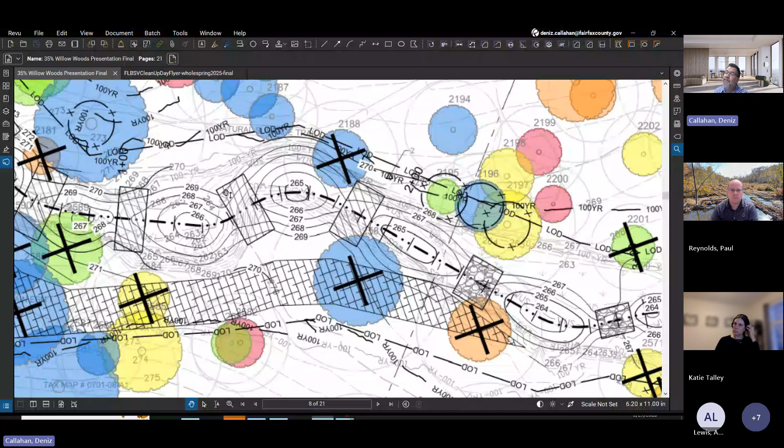These various circles here are what we refer to as grading, which is just moving earth, that sort of thing, depicted by contours. These circles have elevations associated with them. These other circles are pools, and these structures create like dams at the bottom of each pool. That's a method we use to step the pool or stream down as you progress downstream. I don't want to call it a waterfall, but that's kind of what it is.

There's a legend here on the right side of the sheet. Again, if you wanted to come back and look at the presentation, anything that stands out to you on the plan is briefly described here on the right side under the legend.

Are there any questions so far from anybody? Okay.

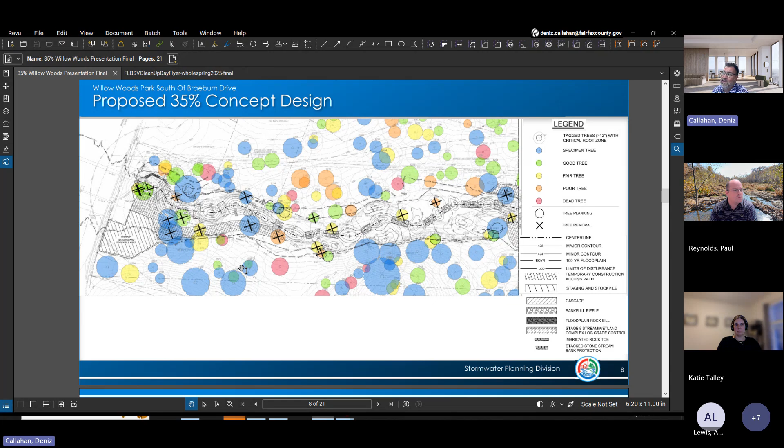So this is the upstream end of the project. On the next sheet, this point right here is what we refer to as a match line. If I go to the next sheet, my hand right here picks back up right here. Okay, so we continue downstream.

This is the proposed center line for the design of the main channel of the stream. It goes in and ends approximately at that point, at which point it enters an existing storm sewer system.

I think I touched on a tributary or an intermittent tributary earlier on - that would be this guy right here. The proposed work we have for that intermittent tributary is less extensive than the work proposed for the main channel.

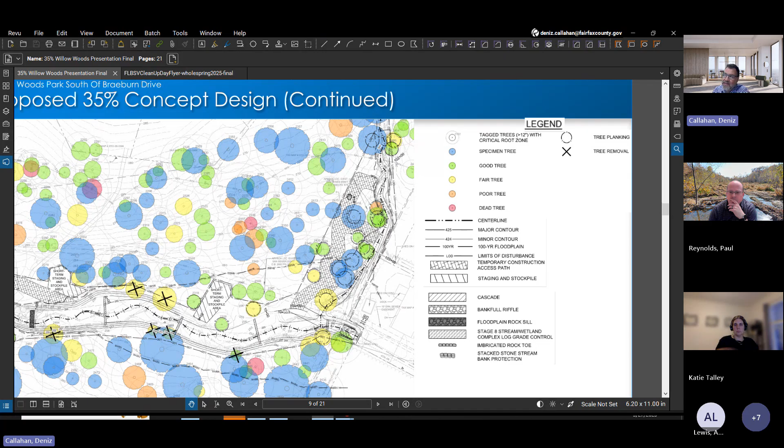Again, this temporary access road here is denoted by this brick hatch pattern that looks like a very squiggly road. It's temporary, and it's there to allow access to the tributary to do the work.

We wanted to provide this slide here again, not to harp on design considerations, but we really do go to great lengths, both the county and our AE Biohabitats, to try and do the right thing and design this so that we minimize impact, et cetera.

So just touching on some of the tree stuff I went over - right now at this stage, that little squiggly in front of the 424 means approximately 424 trees were surveyed, again only the ones 12 inches in diameter or greater. At this stage, approximately 25 trees are proposed for removal, which I think is really good, but that is subject to change, so please don't hold us to that. Again, the point here is to show that we really try to consider that.

I think I touched on it earlier, but the removed trees will be reused on site to the extent possible. We're continuing to refine the tree removal plan from the previous two slides. As design progresses, there could be some more tree save, but at the same time some more tree removal necessary. So all that comes to fruition as design progresses and finalizes.

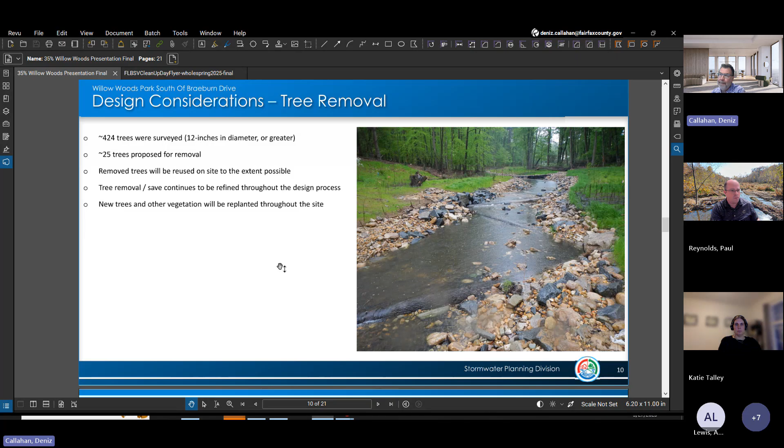This is the last technical slide here. I wanted to provide this just to show essentially what's happening with this project. So the two diagrams here to my right, if you follow my hand, this is as if you're standing in the existing stream, either looking downstream or upstream. And the dashed line here is the existing channel, the existing stream - so here, as well as here.

With this particular project, in general, what we're doing is raising the bottom of the stream, which helps to alleviate a lot of the things I touched on earlier. It eliminates the deep cut, incised channel. It eliminates the widened channel. Doing this helps to spread the water out onto the forest floor, etc. So all these are very good things.

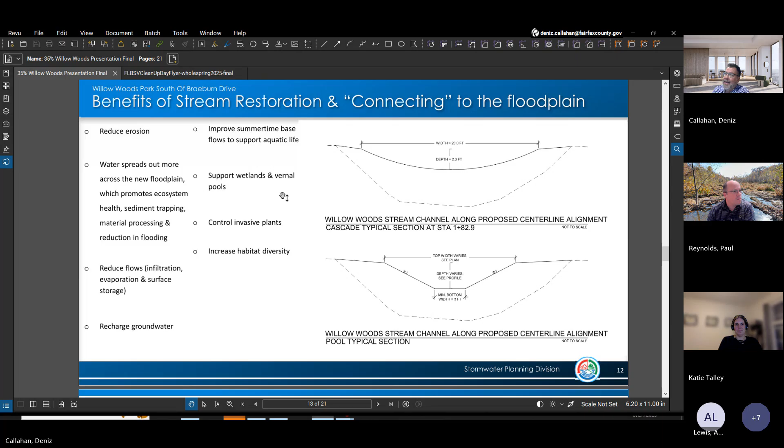Another big benefit is stream restoration helps to support wetlands and vernal pools. I had to look up exactly what vernal pools meant, but those are just small, shallow wetlands that form in the spring from rain or snow melt. They eventually dry up, so there are no fish in those, but that's a good thing because it makes those areas good breeding spots for amphibians and insects like salamanders and frogs. That promotes biodiversification, which is just a fancy term for more species and more genetic variation, touching on habitat diversity.

Moving on to the next slide, a couple of project requirements and impacts. I've got about 9 minutes here, so I apologize, but I do want to take some questions, so just bear with us.

I touched on the construction entrance off of Braeburn Drive. There's one entrance for the project, that would be it. There's an existing asphalt path from Rosedale Lane that goes in a westerly direction, spans, and ties into that pedestrian existing bridge I showed earlier, and continues on to the Canterbury Woods Elementary School property.

It's very early in design here, but the plan is to have an intermittent closure of that existing asphalt trail. There certainly will be times where the trail has to be closed, but we're trying to have it open when possible to maintain that pedestrian connection between Rosedale Lane and Canterbury Woods Elementary.

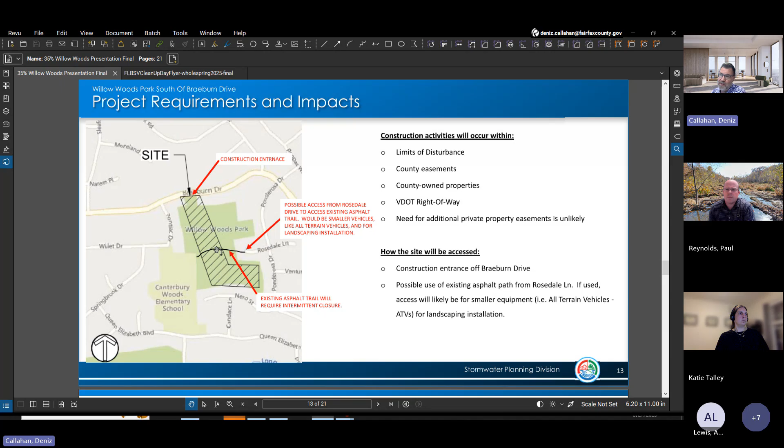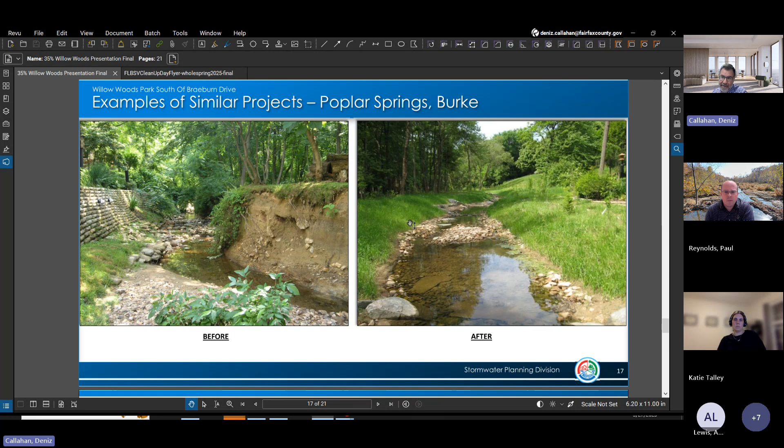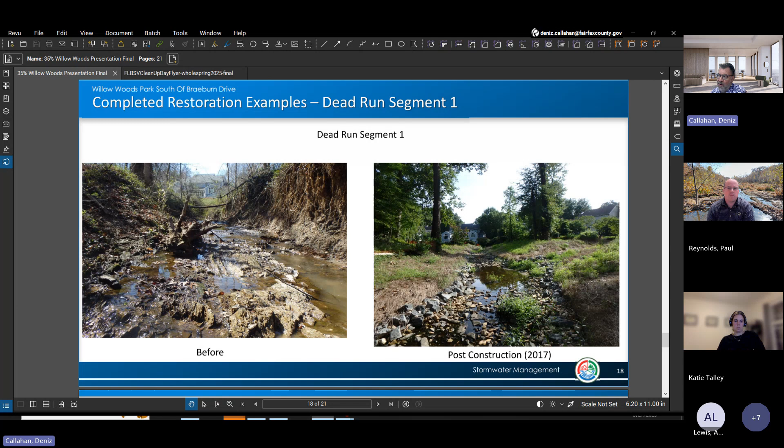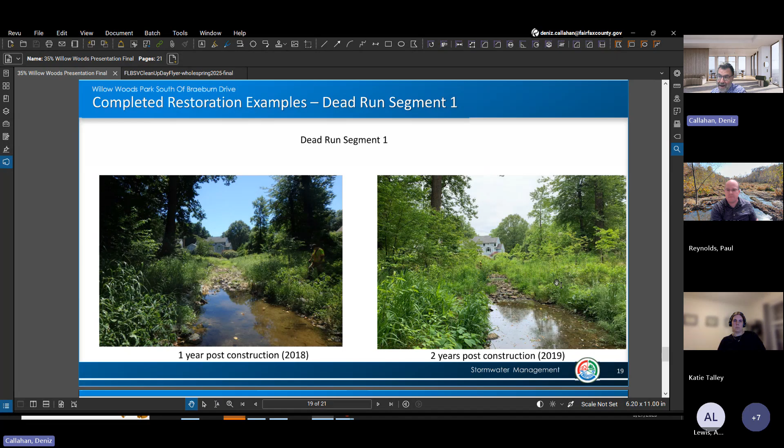So we'll continue to have public meetings as design progresses at various milestones in design. Construction timeline is yet to be determined. Our goal right now is continuing with design, finalizing design. There's an awful lot that goes into that, a lot of cooks in the kitchen, if you will. But the goal is to finish the design, get it permitted, at which point we hand it over to a different department down the hall, and they begin the bid process and manage the construction of it.

After it's constructed, we do something called post-construction monitoring. We are actually currently doing pre-construction monitoring, which essentially monitors the condition of the stream from a sediment perspective, a vegetation perspective, even amphibians—all kinds of different things are looked at during monitoring. We do that post-construction as well, to confirm the stream is functioning the way we designed it and the way we want it to function.

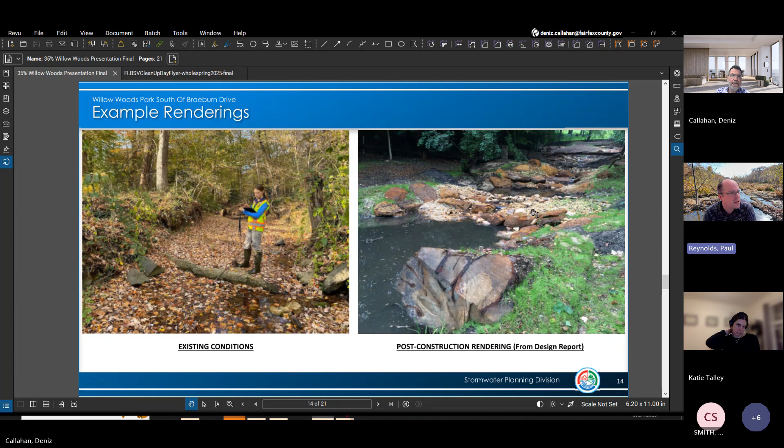I can't see the chat window, so if there's... So Deniz, there was another question from Philip asking about how wide the limit of disturbance is. I know it varies quite a bit through there, but I don't know if you have some average measurements throughout the stream valley of the width of the limit of disturbance. Or if not, I can take some measurements for you. Yeah, no, I can answer that. It varies, as you noted, but let me take a spot here.

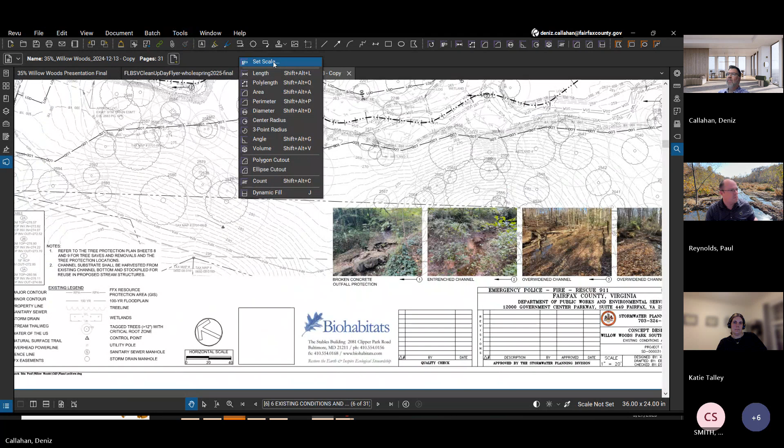Okay, so why don't we pick this spot roughly here? I'll do a quick measurement from here to here.

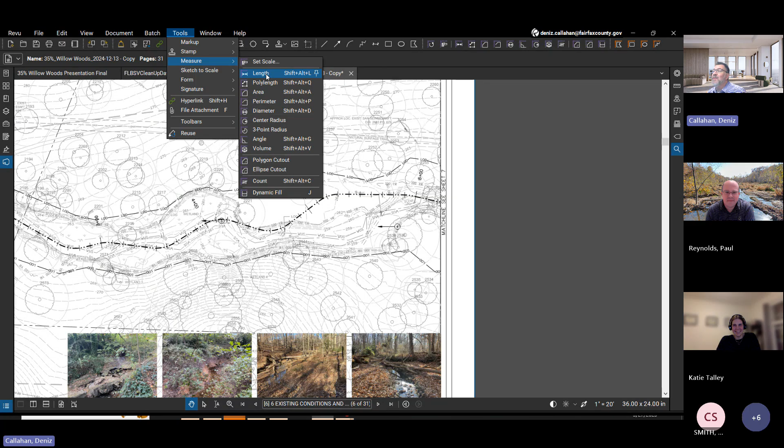Why the screen turns blue like this drives me up a wall, but that's just what happens. I know where the LOD is, so this is approximate. Goes from there.

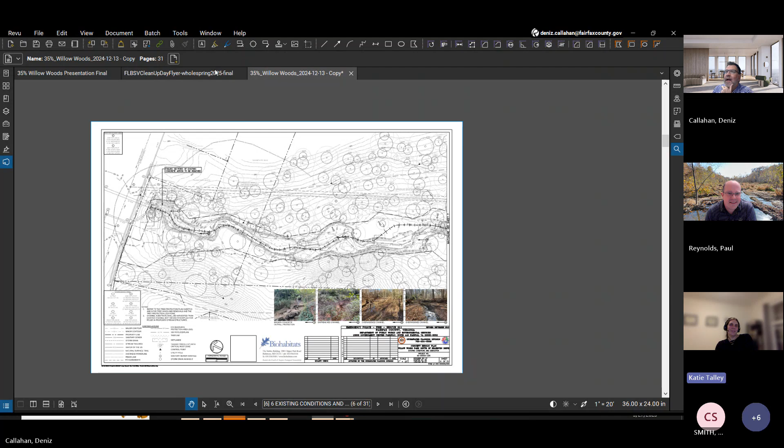Okay, that point is roughly 65, 70 feet. Why it turns blue like that, I have no clue, but you can see it makes it very difficult. Maybe you can help me with that, Katie. I'm sure you have a workaround for that. It happens to me too, so don't feel bad.

I think in some other areas, Deniz, it kind of varies between 40 to 70 feet on average. Some of the wider areas are where we have to have construction access next to the stream, and that's where it gets a little bit wider. Sometimes we're looking for opportunities to work in the stream if possible, to minimize impacts. A lot of it is trying to minimize impacts to what's good and just try to fix what's not good.

So at this point here, as Paul just noted, that's approximately 40 feet, from where my hand is to the other side where the LOD is.

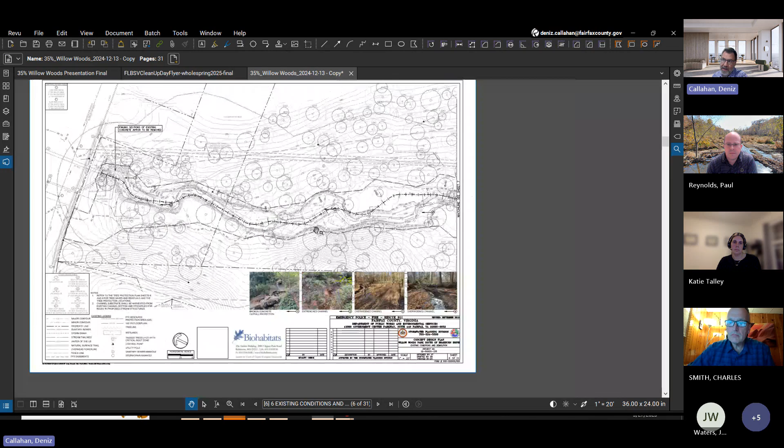But as Charles and Paul just touched on, one of the ways we minimize the dimension of that LOD is by having the contractor work in the stream to do the restoration.

For example, here's a perfect spot. This temporary access road here — if it didn't tie out into the stream, which is a point of access for the contractor to get to the stream and do the work, and we continued this access road along where my hand is like this, that would bump that LOD out here that much further.

So these access roads are typically 18 to 20 feet wide, something like that. 16 is the minimum usually, and that can be very tight. Yeah, so let's call it 18 feet. You would essentially have to bump this LOD out this way an additional 18 feet, plus or minus, in general, thereby having to remove specimen trees like this one right here.

Deniz, thank you so much for the presentation. I wanted to give Jay Horstman, who's here with us from our utility design and construction branch, the opportunity to talk a little bit about our impacts to trails and really hear back from the community on any concerns there. So Jay, if you have the opportunity to unmute yourself and join.

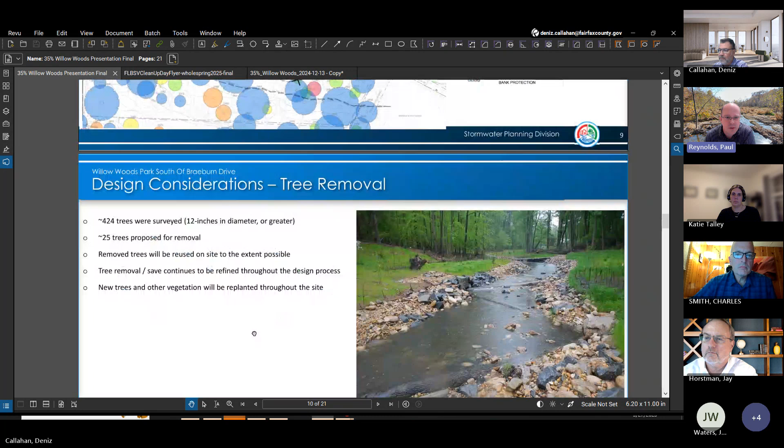Deniz, could you go back to the slide where you had the trails shown as well as Braeburn Drive? I think that kind of captures the different access challenges that we have for the site. Thank you.

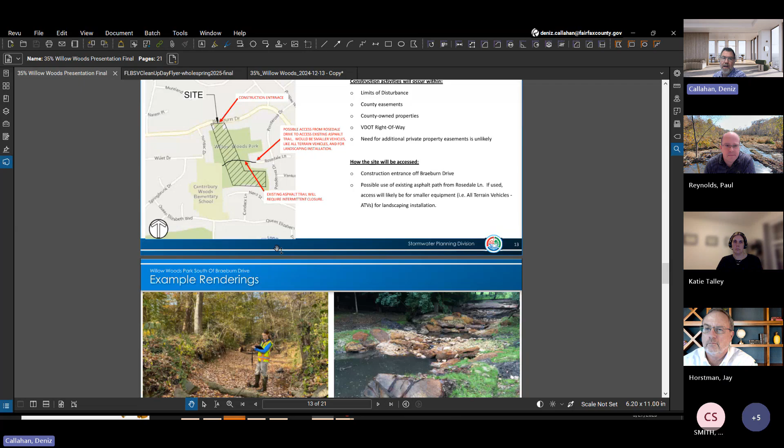This one? Yeah, that slide should work. All right, Jay, it is all yours. Thank you, Deniz.

Thank you, everybody, for attending our meeting here this evening. Another thing we like to do at these presentations is talk to our community about how you guys use this property now. We are working to maintain any and all pedestrian access that is through the site or along the frontage of the site. We know that you guys as the residents are the expert as to how this park gets used by you and the community. So I just wanted to ask you guys to be thinking about how you use the park.

Deniz talked a little bit about the asphalt trail accessing the elementary school. We know that there's sidewalk along the frontage, and we know there's bicycle paths along the frontage. We're short on time here tonight, but if there are things that you guys know about people or ways that this park is being used, please share that with Deniz. Please bring that to our attention.

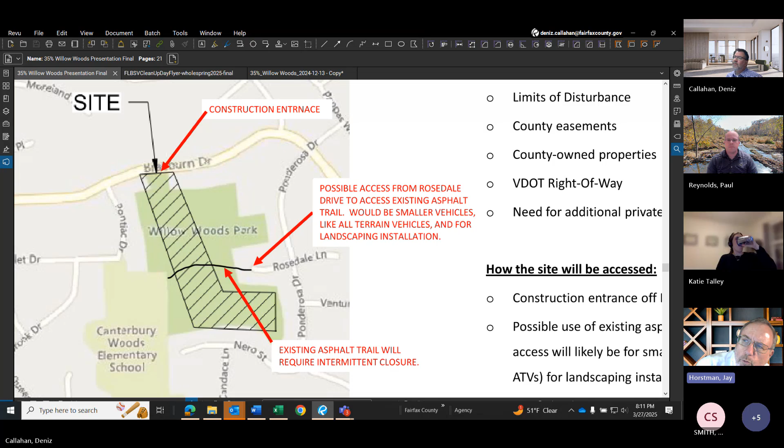Deniz talked a little bit about the intermittent closings of the trail leading to the school. We're aware of the school access, we're aware of school pedestrians cutting through the park to get to the school. If people have any input or questions for us, we'd like to incorporate that into our design for this project. Thanks everybody for attending our presentation tonight.

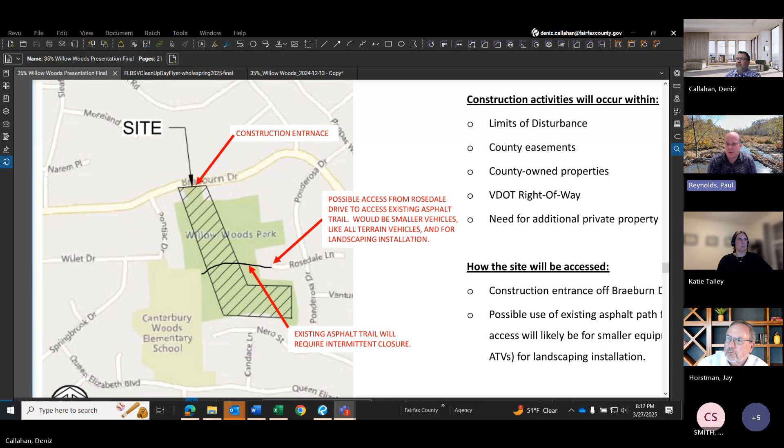So Philip, to answer your question on closing the trail, we're not looking to close the trail that goes from Rosedale to the school. We realize at some point we're going to have a mixing of construction access crossing over that trail, so we're looking to maximize safety with those who need to utilize the trail while minimizing any shutdowns. Likely the natural trail that goes from that paved trail up to Braeburn Drive will have to be closed during construction for safety reasons. We don't want to pose a risk to residents in the area, but we're going to do our best to minimize impacts to the trails. So thank you.

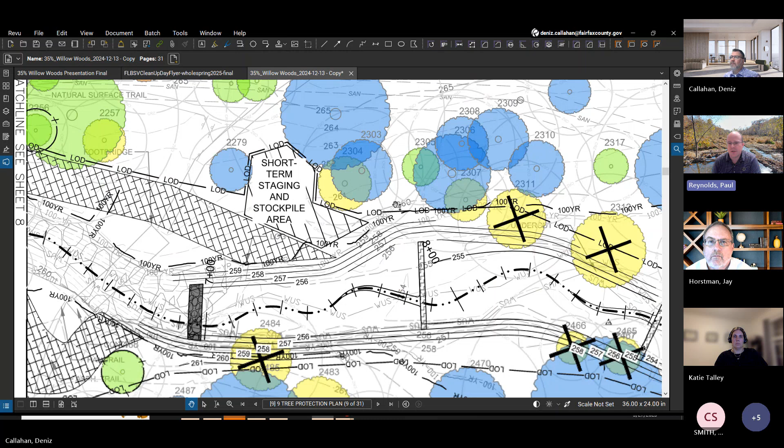Lisa, the manager of the dirt trail you're speaking of is the Park Authority, and we did speak with them on site about that trail. In terms of its condition, any trails we impact with construction would be restored in kind to their previous condition. We're limited in terms of our funding on what we can spend money on, so we can't build new trails, but we can certainly restore anything we impact. I think that answers your question.

It does, yeah, thank you.

I just had a random thought, maybe worth exploring if the school gets interested - I know they do some environmental education with the kids. I think they have a little native plant garden they're trying to expand. So food for thought if there's something y'all might want the kids to help with, or get them out to see it when it's done. That could be a neat opportunity.

Oh, absolutely, I think that's a great idea. I would love to give a tour to kids once the stream is constructed and safe - even during construction if there's a window, but unlikely. We have a group currently engaged with Canterbury Woods doing a lot of education on our streams and the work we're doing, so we have a very active presence there in terms of education and outreach inside our division. Additionally, after the projects are completed, we usually put up educational signage at key points along the project, so there's that opportunity after the project.